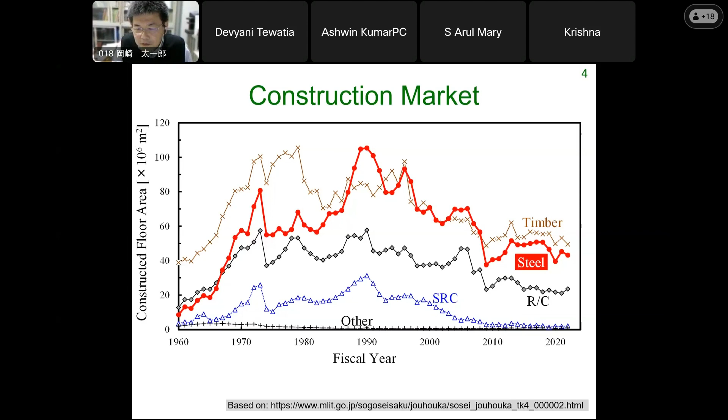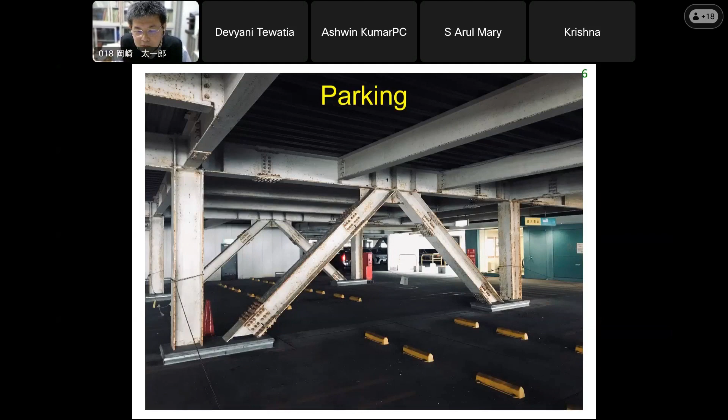Steel is favored for parking. This is a big shopping mall, and something like a good tenth of the building is parking, and basically the whole shopping mall is constructed in steel, and the steel is exposed in the parking area.

Many school gymnasiums from elementary through high school, most schools in Japan have gymnasiums, and those gymnasiums tend to be constructed in steel. Sometimes big gymnasiums would have up to the wall constructed in reinforced concrete, but still their roof would typically be constructed in steel.

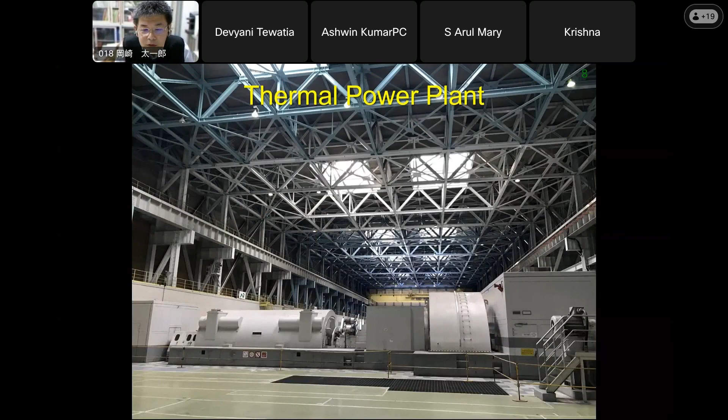Factories. Next time I'll be talking about fabrication shops. Many factories are constructed in steel. I didn't include an example today, but big sports facilities, big sports domes, they also tend to be constructed in steel. So steel is a favorite material for many different kinds of buildings. Typically they are favored for long spans and tall high rises, but they're also very popularly used for ordinary buildings.

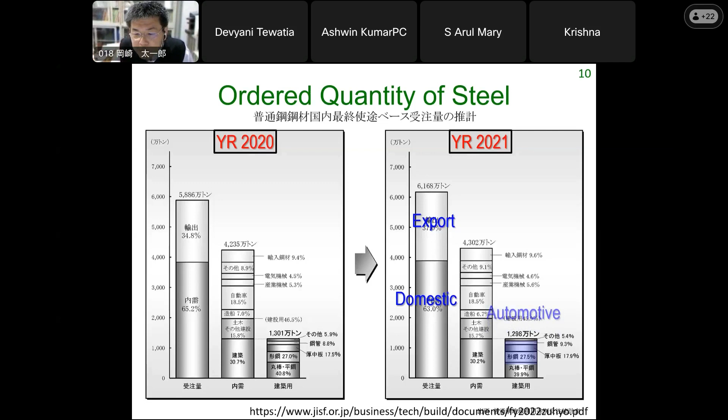And among the 63%, the primary industries that use steel are automotive, ship, infrastructure, and buildings. Buildings consume 30% of the domestically produced steel. And out of that 30%, the section highlighted in blue goes to steel buildings: HSS, plates, shapes, and rods and strips. So roughly 20% of the domestically produced steel goes to buildings.

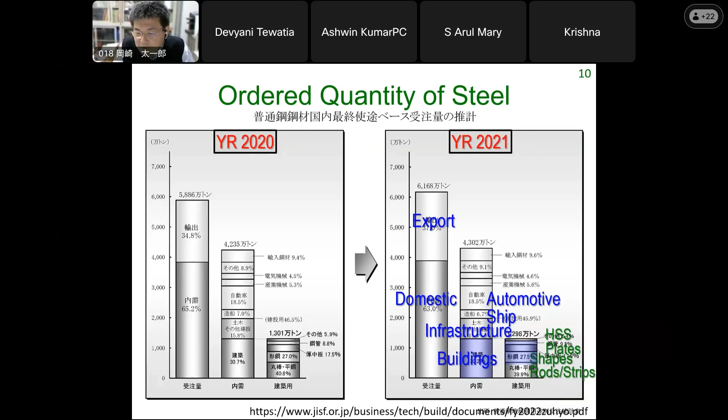There's not a huge change, but one thing about steel construction is that a good 50% goes to low rises. A single story typically means factory buildings. Second, 2 stories, much of this goes to small buildings. Some of them can even be houses.

You might imagine steel to be used for high rises, but the proportion of steel that goes to high rises is not that big. If you look at the latest data of 2022, only 2% goes to very high rise, above 16 stories.

That concludes the introduction about the construction market, how much of the construction market goes into steel buildings. Now, the second part, I wanted to go through the historical development of steel buildings in Japan.

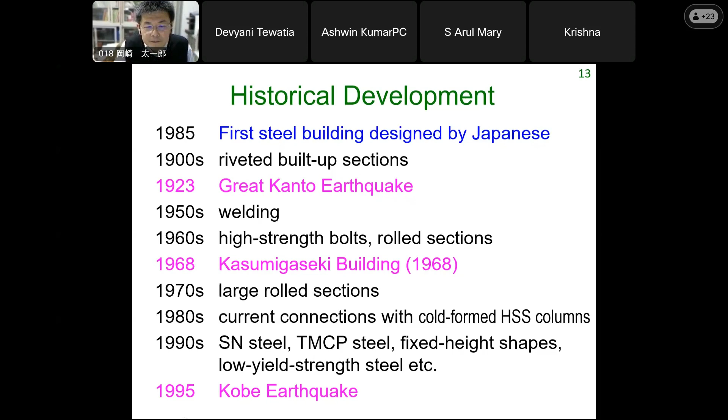Looking into this, I'll discuss more in detail in the second half about the steel available in Japan. But the first industrial steel grade in Japan was introduced in the 1950s, and they were called the SS or SM grade. Rolled shapes became available in the 1960s, and in the second half of the 1960s, we began to form HSS, the square and round hollow sections.

Now, in the 1990s, the newer steel grade was introduced. It's called the SN grade. And another important aspect is that this grade for HSS sections that we named BCR and BCP were introduced.

Okay, so I'll revisit this later, but basically by the 1990s, the type of steel available today and the construction schemes available today were introduced to the market.

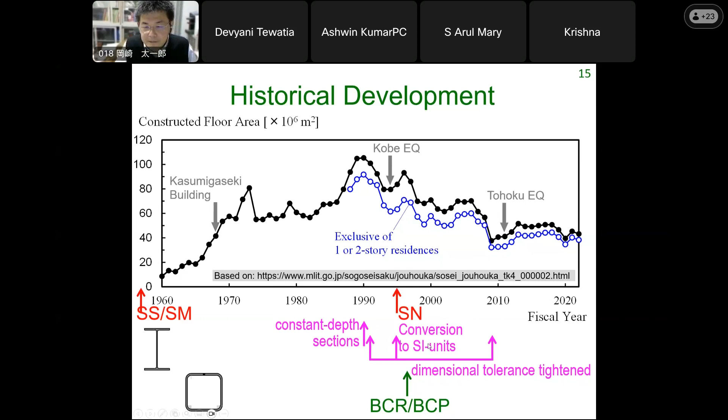Now I'm going to talk about some of the pivotal events. The first, the 1923 Kanto earthquake, exactly 100 years ago.

At the time, steel buildings were constructed in Japan, but they were sought as a very economical method to form big office buildings. The technology was imported directly from the US, and some of the first large steel office buildings constructed in Tokyo were designed by American engineers. Now, these buildings didn't fare very well in this earthquake.

They adopted the latest US design at the time. They didn't exactly collapse, but as you see in this photo, they underwent very severe non-structural damage. They didn't fall apart, but they experienced extensive damage to the exterior finish. Back then, the style was that every building should look like masonry in appearance, but those that appeared to be masonry were not detailed to carry lateral loads. The steel was very flexible and allowed a lot of deformation, and the external finishes were not able to follow through the large deformation.

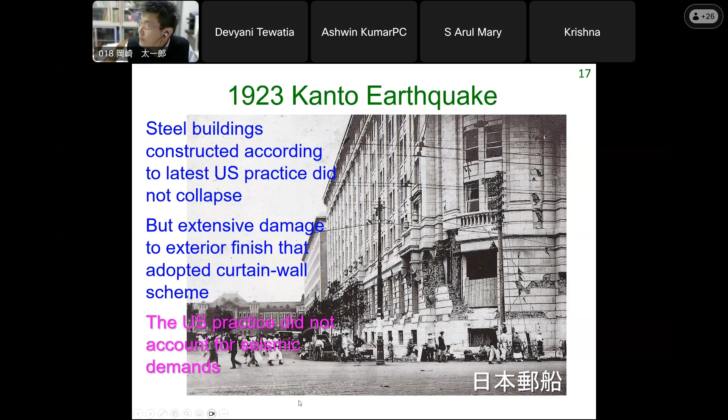Basically, the U.S. engineers at the time did not know about seismic demands. Another example, a different building - these photos were taken 100 years ago, so they're black and white. You see a lot of cracking marks, and it's very clear in this photo that the building is tilted after the earthquake.

The perception was that steel buildings are not good for earthquakes, meaning steel buildings are not very good for use in Japan. Other construction types fared much better than steel buildings at the time. Steel buildings didn't collapse, and probably didn't kill a lot of people, but the severe damage to the external finish meant they had to go through very extensive repair, or they had to give up use of that building.

Steel was denied, and after this Kanto earthquake, steel reinforced concrete, the SRC that I briefly mentioned earlier, and reinforced concrete shear walls became the system of choice. This building I'm showing used very bulky reinforced concrete shear walls, and it survived the same Kanto earthquake with hardly any damage. So, in comparison, steel didn't look good.

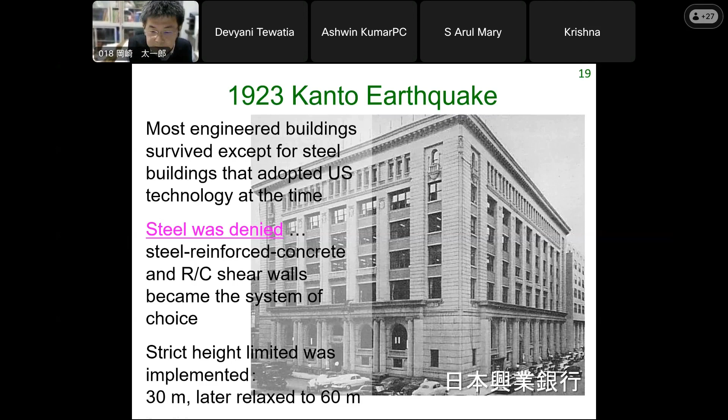One of the first buildings that broke that 60-meter height limit was the Kasumigaseki building, constructed in 1968. It took 40 years after the Kanto earthquake, or 45 years to be more precise, to revisit high-rise construction. The Kasumigaseki building exceeded the 60-meter height limit by a big margin - it was 147 meters. It has gone through several upgrades, I think 3 or 4 major ones, and it still stands in central Tokyo today. This building marked the beginning of high-rise construction in Japan.

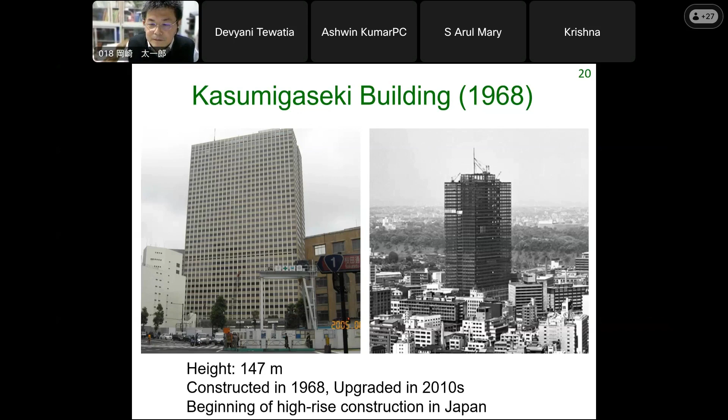Now, about the same time, I want to introduce the Century Royal Hotel, constructed in 1970, not exactly the same time as the Kasumigaseki building. This stands at 69.3 meters, exceeding the 60-meter mark. This was actually the first building in Hokkaido, the region where I am, to exceed this 60-meter limitation - qualifying as a high-rise building in Japan.

And to those of you familiar with steel design, this was actually the first eccentrically braced frame in the world. Eccentrically braced frames, or EBFs, were researched in the US in the late 1980s or 1990s, but this building was constructed decades before that time.

Sadly, it's been more than half a century since this building was constructed. They decided to demolish this building next spring.

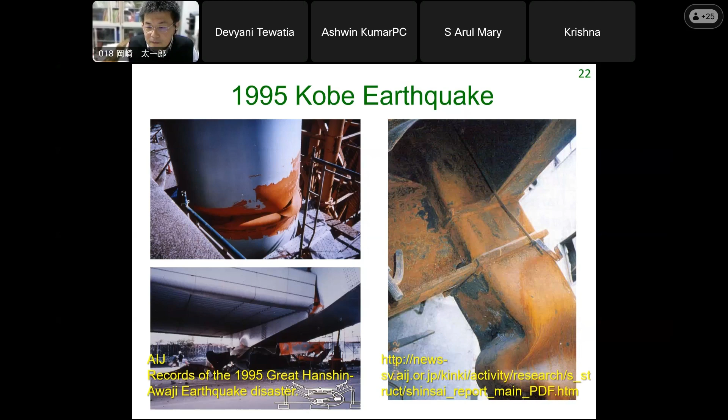This is a steel construction. To the right, this is a steel building. The connections performed quite well, but look how badly the column is deformed. The Kobe earthquake damaged many steel buildings and facilities. This photo assembles damage to steel braced systems.

The diagonal braces tend to be the first structural members to experience damage in an earthquake.

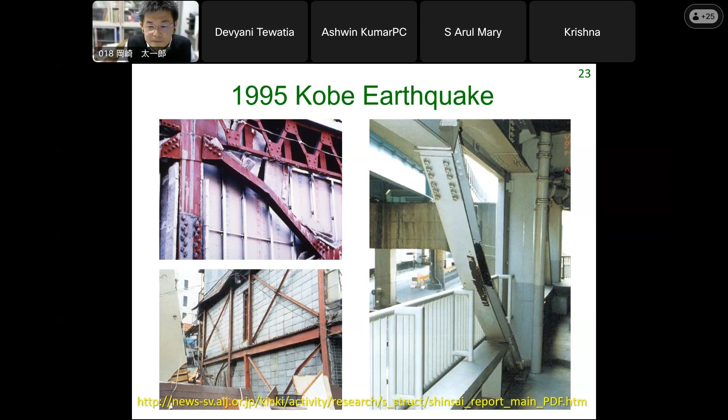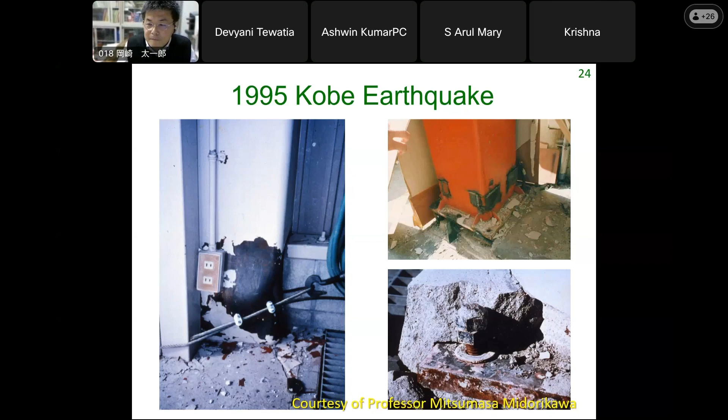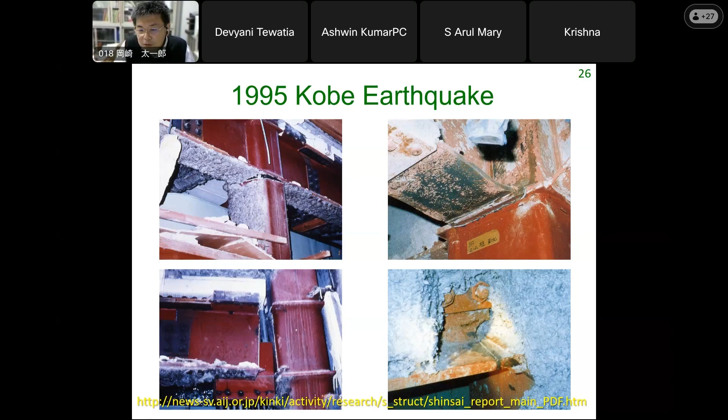Now let me spend some time explaining this. Many buildings experienced this damage. In many steel buildings, the rigid connection between the beam and column fractured at the bottom beam flange. To take a very close look, here.

This fracture tends to happen near the weld cope. To achieve a complete joint penetration groove weld between the beam flange and the column, we would want to introduce a weld cope to allow continuous welding across the beam flange. But people realized that the presence of the weld cope seemed to have been the direct cause of the fracture. In this case, the fracture probably initiated at the end of the weld cope right here, and immediately fractured across the entire beam flange.

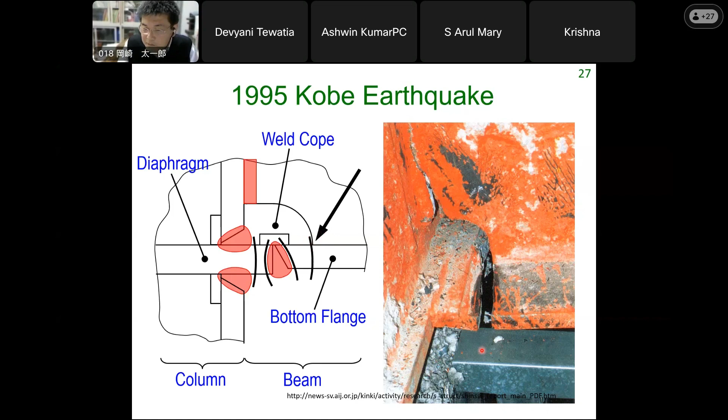After the bottom beam flange was separated, the fracture started to go into the web. This type of failure was observed in many different buildings. Another example, looking at the bottom beam flange connected to a column: similar to the example I just showed you, the fracture seemed to have started at the end of the weld cope.

Another example. In this case, the connection seems to have done a little better because we see good evidence of plastic deformation in the beam flange. Anyway, people realized that the welded connection between the bottom flange and the column is where we really need to pay attention to achieve good steel buildings.

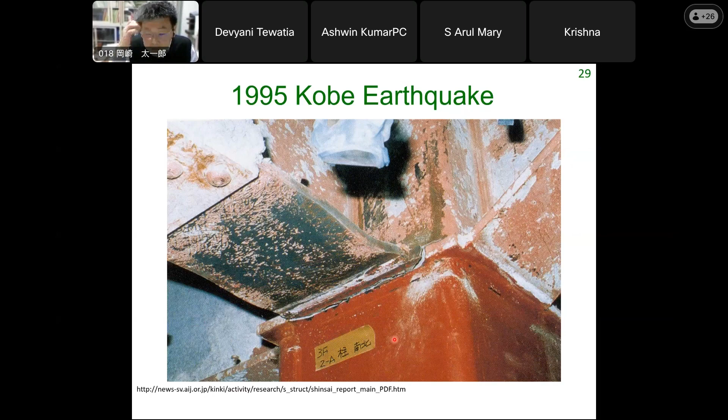I'll talk about this a little more next time, but I wanted to give you an idea that a lot of this experience, or what we do in the design and construction of steel buildings, is established based on all these experiences in the past.

Okay, moving on to the next subject: the types of steel that are available in Japan.

This may be somewhat detailed, but it's a unique feature I want to convey today. There are two types of steel used for buildings in Japan. One is the type defined in the industry standard, and the other is a category we call minister-approved steel, which is not part of the industry standard but is approved by special permit.

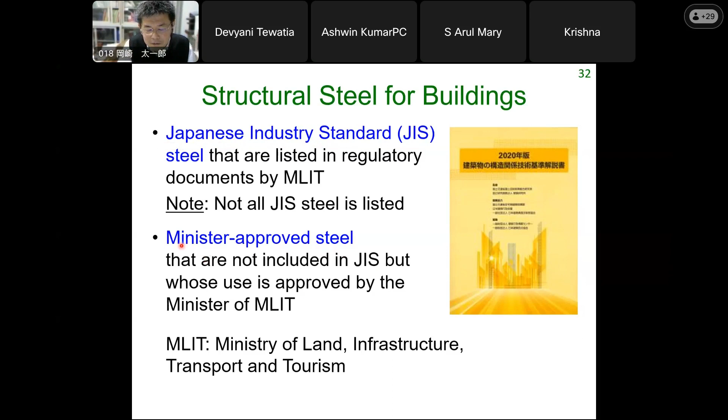The newer steel tends to be outside of the JIS. They are not part of the JIS, but they are approved company by company and factory by factory by the Ministry of MLIT, basically the Ministry of Construction. So this may be one takeaway about Japan: we have two different types of steel. One is part of the industry standard, and the other is not part of the industry standard but is permitted by special approval.

With that in mind, I'm going to walk through the most common grades of steel in Japan. The first and original grade is SS. There are actually three different grades, but today we don't see SS490 or SS540 on a regular basis. There's this original SS grade, but also a somewhat improved SM grade. The difference is that SS is the basic grade, and SM has tighter requirements to secure weldability. SS and SM were the first two grades for building construction.

The numbers 400, 490, 540 list the strength grade. I'll talk more about what these numbers and symbols mean, but right now please recognize SS and SM. The new grade was introduced in the 1990s, and we call this SN. SS, SM, and SN are the three fundamental steel grades in Japan. What I highlight in yellow are the particular grades that are commonly used. The other ones are not very commonly used - they're listed, but not commonly used.

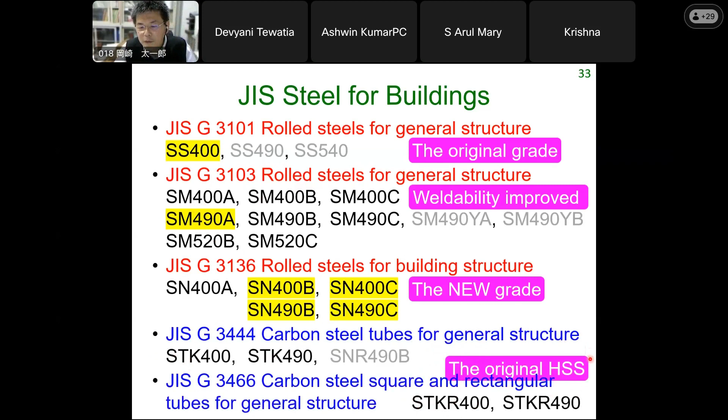We have specific grades for hollow steel sections - for rounds and for square and rectangular shapes. The rounds are called STK and the squares are called STKR. STKR were the original square sections. You don't need to memorize all this, unless you're designing in Japan, but I wanted to give you a feel of the steel available in Japan.

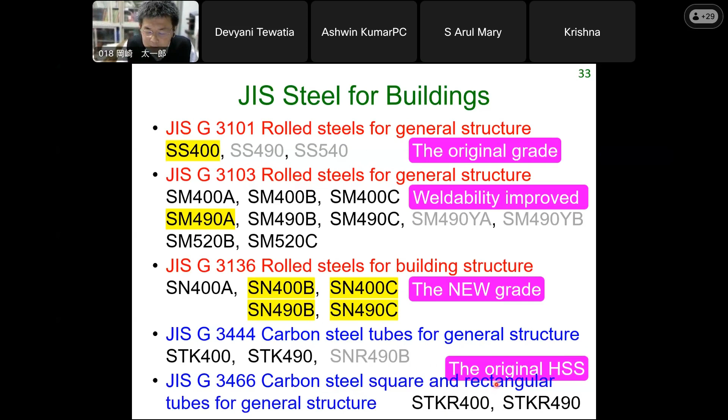SS was the original grade, established in 1952 following the British standard at the time, so there's a lot of similarity between the British standard then and SS. Later, more recently, we introduced SN steel in 1994, primarily to meet the requirements for seismic design. The two objectives were to reflect advancement in manufacturing and quality control, and second, perhaps more importantly, to include ductility requirements.

The ductility requirement is specified by what we call the yield-to-tensile strength ratio. If the tensile strength is somewhat higher than the yield strength, that means the steel tends to have good ductility. But if the yield strength is close to the tensile strength, the ductility tends to be poor. So controlling the yield-to-tensile strength ratio to be lower than a specific value is an effective means to control ductility. The American standard does the same, and the European standard also introduces this yield-to-tensile strength ratio for the same objective.

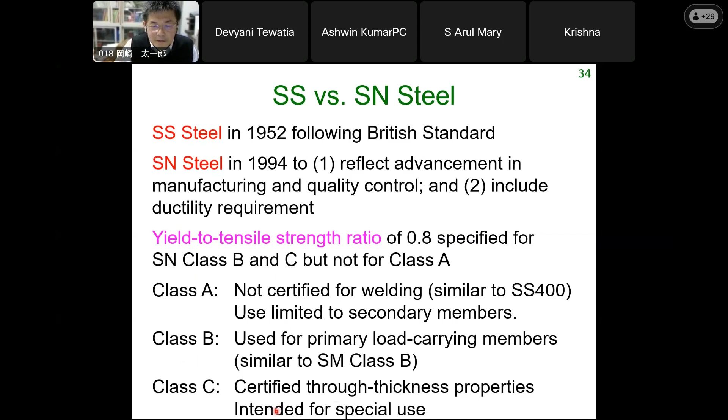I walked you through the industry standard steel. Next, let me walk you through the special, the minister-approved steel, approved company by company or factory by factory.

This approved steel is used very commonly in Japan in the form of square HSS. Most buildings in Japan use square HSS for columns, and those columns would be either BCR or BCP.

Other than this commonly used BCR and BCP, we have the higher strength grade and TMCP. TMCP, I forgot what it's short for, but this is a scheme to control the strength of steel, or achieve high strength, by controlling the heating and cooling cycle.

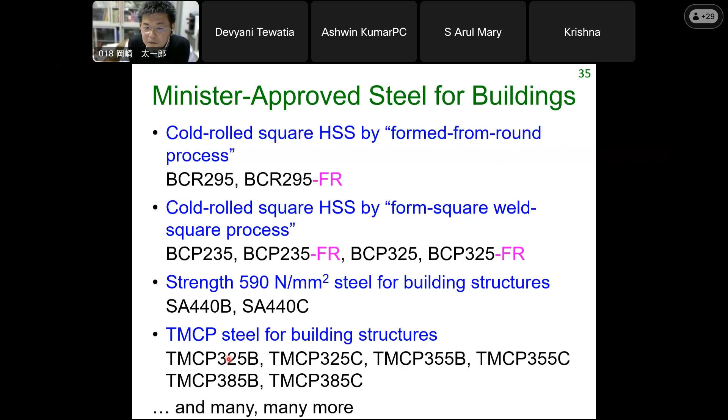These are examples, and we have many minister-approved steel types. I mentioned that almost all steel buildings in Japan use square HSS, and there are two types of manufacturing schemes for HSS: one is form from round, and the other is form square, weld square.

The first one would bend a flat plate to form a circle and weld where the plates meet, first forming a circle or round shape. Afterwards, squeeze from four sides to achieve a square shape. This is the first type of manufacturing.

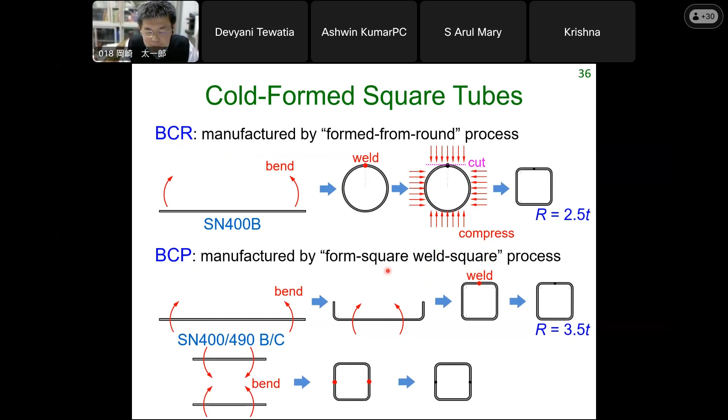The HSS formed in this scheme is called BCR in Japan. The second type is to bend the plate at the corners and weld where the ends meet. I believe the same process is used anywhere in the world, but the difference is that Japan uses these two manufacturing schemes very extensively.

Let me mention the designation rules between the industry standard steel and the minister-approved steels. I walked you through some of the most common steels, the SS, the original one, and SN, the more recent one. For SS and SN, the numbers mean the minimum tensile strength, so we have strength grades 400 and 490. A, B, C are the subclasses I mentioned.

Now, for the minister-approved steel, there's a different designation rule. The letters at the first would mean the type of steel or the type of manufacturing. The numbers, unlike the industry standard steel, these numbers 295, 235 mean the minimum yield strength, sigma Y, as opposed to sigma U.

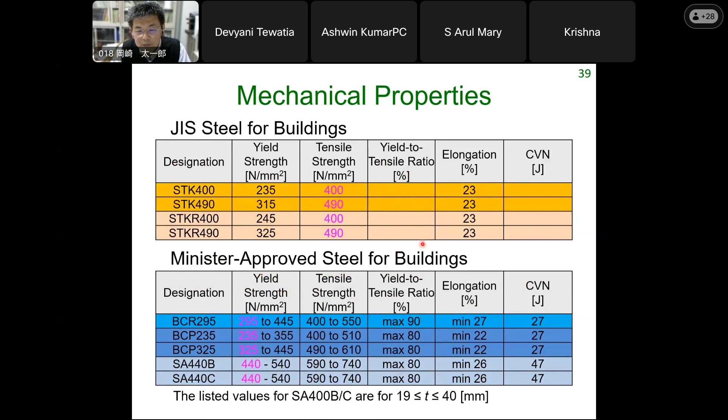One important quality control scheme for steel is weldability. The American Welding Society uses the international carbon equivalent, written in this equation, but for some reason Japan uses a different definition of carbon equivalent. We have two types - they're named differently, but they both serve the same purpose: to control weldability of steel through chemical content.

We know that carbon is good to have in steel, but if you have too much carbon, you tend to experience cracking as you weld the steel. So you don't want too much carbon. All the other chemical components are transformed into carbon equivalent - some of them are good to have, but if you have too much of them, you degrade weldability.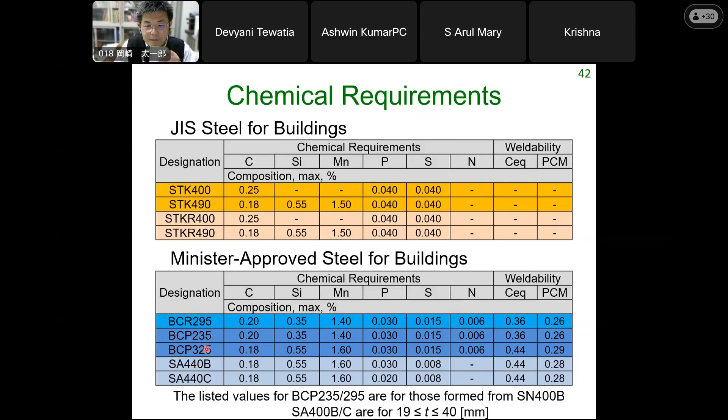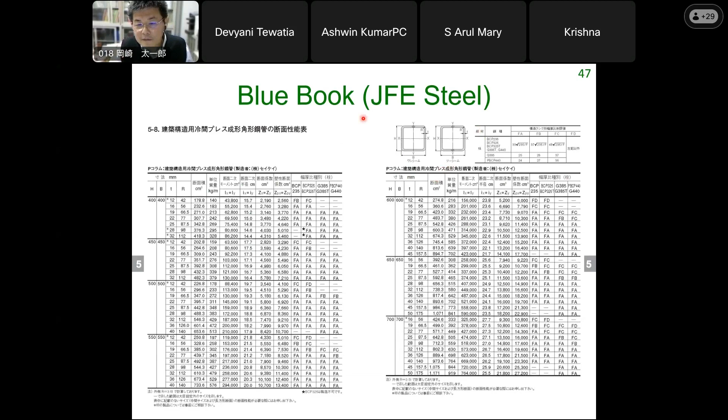Okay, that concludes part 3. Gradually moving to the design part of today's talk, let's go into codes and specifications.

The design methodology in Japan is actually quite complicated because many different books are provided by different entities. The one book that has absolute authority is the one prepared by the Ministry of Land, Infrastructure, Transport and Tourism. The Ministry of Land, Infrastructure, Transport and Tourism maintains the building law of Japan - this is the building law that any engineer has to adhere to. The law is supplemented by many sub-documents.

The second entity is the Japanese Industrial Standards. I've already mentioned this - the JIS specifies the materials and some building standards. There are also local jurisdictions - big jurisdictions like Tokyo and Osaka prepare their own design recommendations. There's also a different category of design requirements for government office buildings.

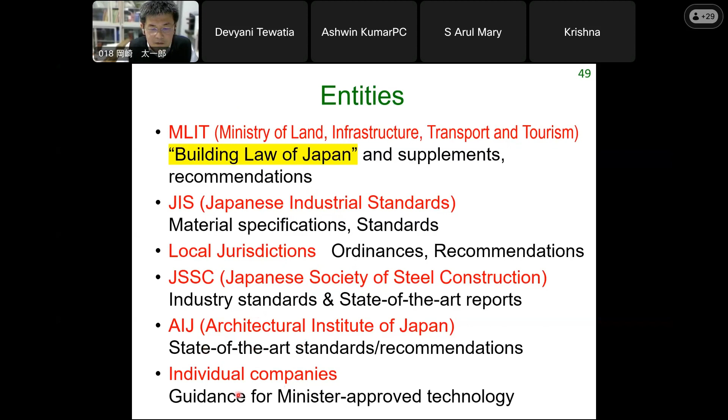Among these different codes and specifications, two entities tend to have the most authority. The left one, of course, is the building standard law - everybody has to follow the law. On the right-hand side, we have the professional society, where all the academics chip in. The academics come together to assemble and put together minds, to explain the newest research results and explain design rules in a better way.

So what's happening in Japan is that the law is the law, and the academics are academics, and there's not a direct connection between these two bodies. This is the AIJ, the academic documents - they tend to be the most updated, and therefore are referenced by engineers to supplement what the law requires. It contains the state-of-the-art academic knowledge. This is where research contributes - I, for one, do research, and one direct thing I have in mind is to contribute to the academic documents prepared by AIJ.

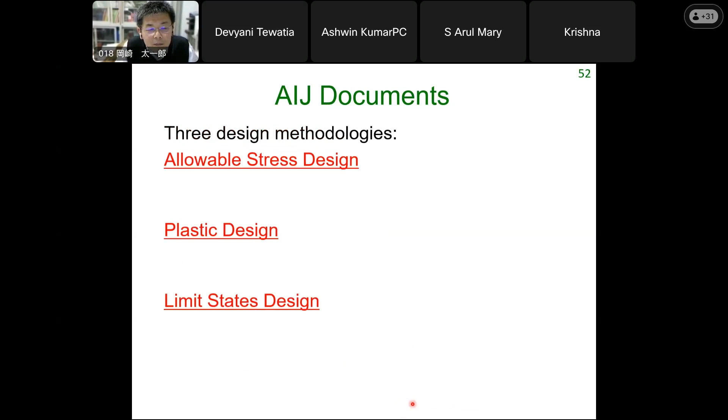What does the academic society do? We organize design rules, the three fundamental design rules. They're probably acknowledged anywhere in the world in the realm of steel design: the allowable stress design, plastic design, and the limit state design, or LRFD.

We pay attention to all three design rules, and these documents are frequently updated. This hand points to where I am a part of.

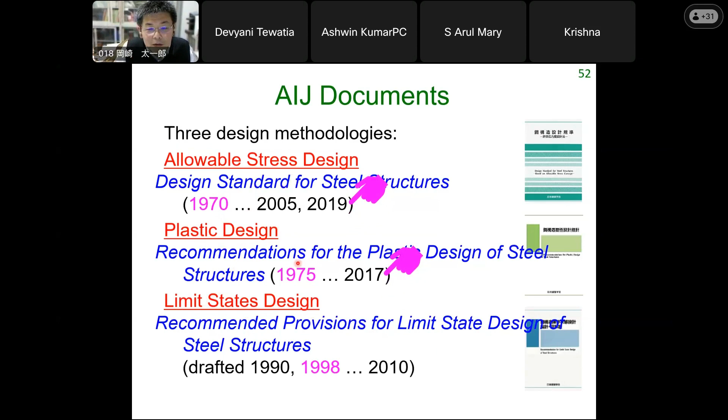The academic society prepares many other design recommendations for composites, for fire, for connections, and for tubular structures. These documents are updated every 5 to 6 years to share state-of-the-art knowledge with the community.

One area of emphasis is connections. We have recommendations for connections, and we have supplementary documents that detail bolted connections, welded connections, and column-base connections.

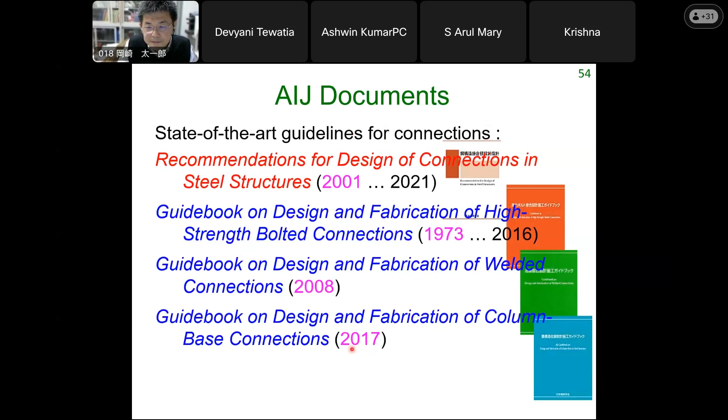The AIJ also standardizes the fabrication and construction requirements. We have two thick books, one for erection and one for fabrication, and these two books are very heavily referenced by regulations.

The AIJ Academic Society goes into really high-end techniques. One book that probably doesn't exist anywhere else in the world is how to design buildings with supplemental damping systems. There's also lightweight steel structures, and a series of books that summarize state-of-the-art guidelines for stability and sustainability. By the way, I'm also part of this last one on sustainability.

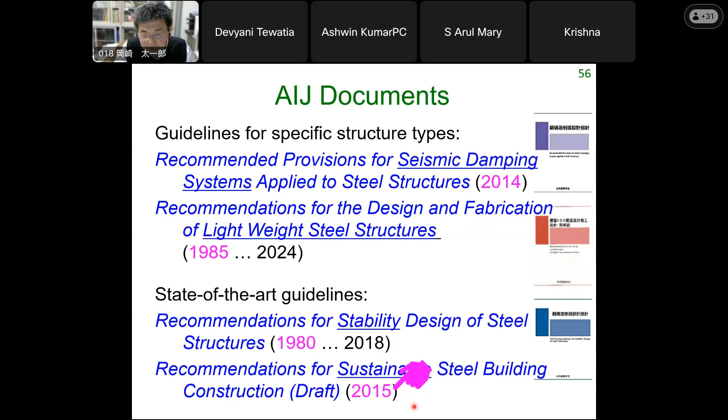I probably covered a lot of ground, but these are some of the things I wanted to emphasize. The AIJ steel documents have been updated quite frequently, because our academic community has been very active.

One aspect of what we do is that we have not converted to LRFD like the rest of the world. This is primarily because the design earthquake load is strictly governed by our building law of Japan. Because the load is defined by law, it's very hard to update the load requirements. And if you cannot control the load requirements, it's nearly impossible to discuss the reliability of our design. This is probably where we are stuck in converting or advancing to LRFD.

Now, I mentioned that we have a lot of documents, but I do personally feel that we need more coordination, because we publish a lot of books, but we don't have a single book that covers all. We feel frustrated that the building law does not change, but we probably need to accumulate convincing evidence to tell them how we can do better, and why we need to change the law.

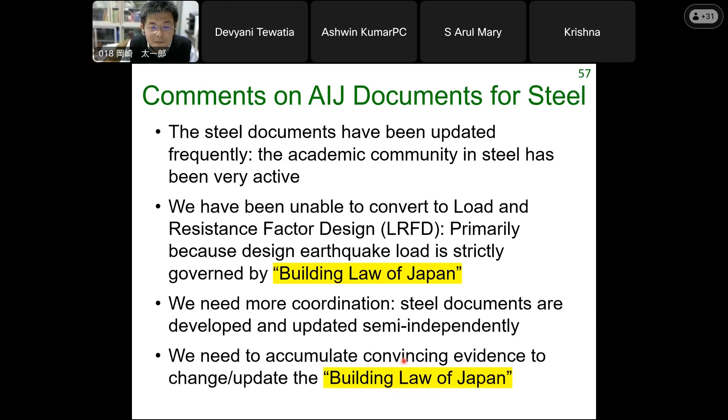Now, moving to perhaps the most important part of today's lecture, the design procedure in Japan. Going back a little in history, the building standard law is what dictates our design rules. It was first introduced in 1919.

One good thing we can say about ourselves is that after experiencing the Kanto earthquake 100 years ago, we were the first to implement seismic requirements. Back at the time, we said the seismic coefficient is 0.1 for a safety factor of 3. So the high minds at the time said the base shear coefficient is basically 0.3, meaning the safety factor times this coefficient of 0.1.

And this 0.3 is still used in our building requirements today. There was a name change: the urban building law, which only covered big cities in Japan, was spread to all buildings in Japan in 1950.

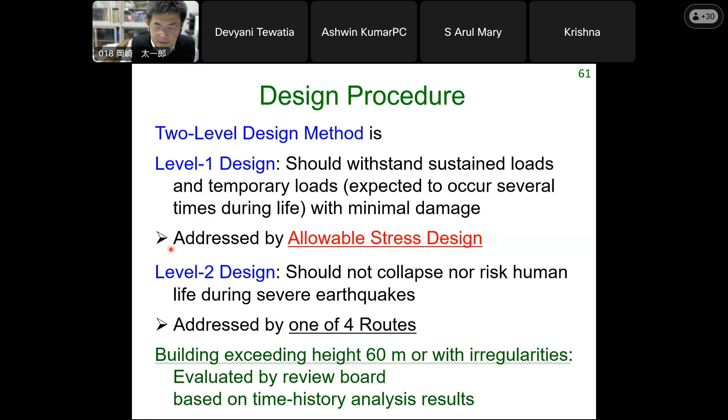Now let's talk about level 1 first. This is addressed through allowable stress design. I know it's archaic, it's been around for a good century. The requirement is that the computed stress should not exceed the allowable stress, and this sigma not exceeding f should be checked for all fibers of all sections of all members.

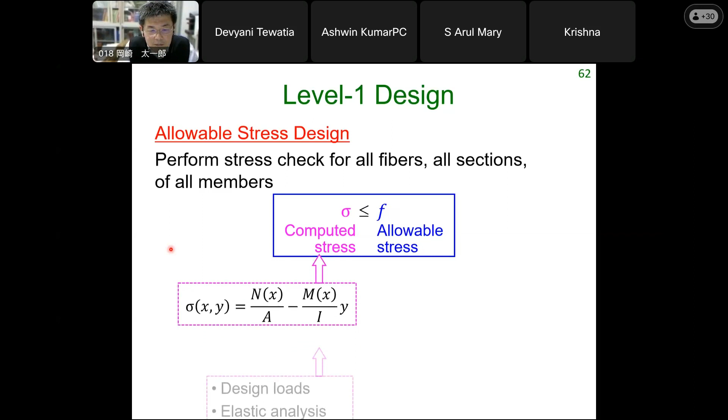The computed stress is an outcome of elastic analysis conducted on the basis of the design loads. The allowable stress is defined by the material strength, the limit state governed by either yielding or stability, and a safety factor. I think this is common knowledge to the whole world, but let me walk through the specific procedure in Japan.

So this is sustained load, meaning basically dead load plus live load. If you are in a very heavy snow area, you should toss in some of the snow load. There are three different temporary loads: snow, wind, and earthquake. In heavy snow areas, you need to consider the combination of dead and live load being there, and earthquake hitting during the winter time - not the full snow load, it's reduced, but including all four loads.

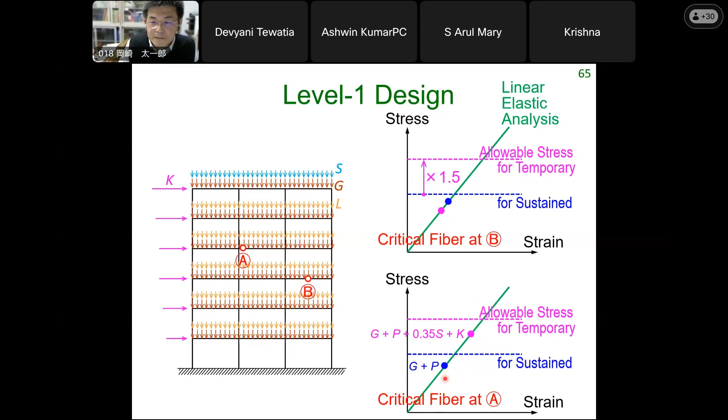Now let's look a little more detailed into the loads, particularly the earthquake loads. To the left is the seismic hazard map of Japan. Skipping the details, the darker red means high seismic risk, and blue or green means low seismic risk. So there is disparity in seismic risk in Japan - the far northeast has high risk, but there are actually parts of Japan where the seismic risk is relatively low.

But if you look into recent history, the two most recent major earthquakes in Japan, one in 2016 and one in 2018, they happened in areas where the risk is recognized as low or not too high.

Therefore, in Japan, we do not use this seismic hazard map very often, and we use this map on the right, where darker means larger earthquake load and lighter or white means smaller earthquake load, which is far less detailed compared to the seismic hazard map on the left. And the difference in earthquake load between high seismic and low seismic is not much.

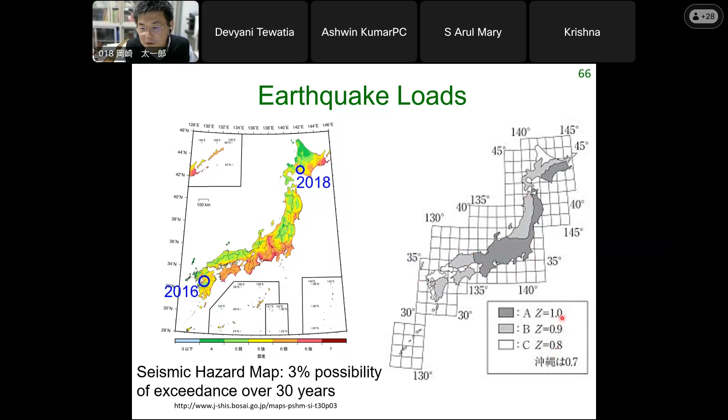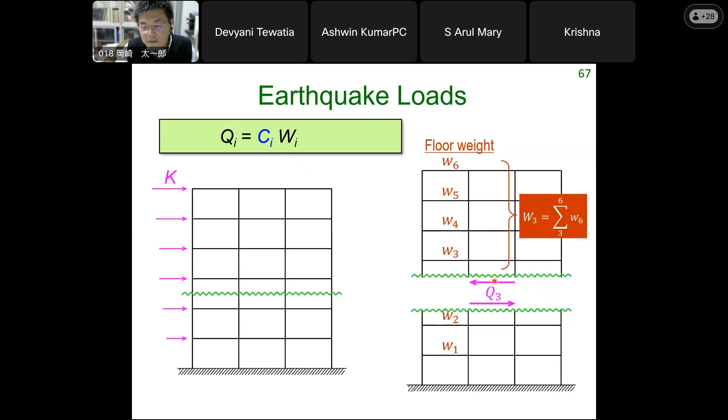Now, the load distribution is computed like this. K indicates the load distribution, but in design, what we directly compute is the story shear force, Q, as a proportion of the total floor weight resisted at that story. At this third story, the weight of the third, fourth, fifth, and sixth floors are sustained. The story shear is defined as the proportion of the weight sustained at that story. So if you want the earthquake load, you could back calculate it as the difference between the story shears.

So the earthquake load is proportional to the floor weight. I think this is common anywhere in the world, but then how is this proportion factor Ci calculated? This is a product of the seismicity zone factor that I showed earlier, where the difference is only between 1 and 0.8.

This Z factor. We account for soil amplification, the vertical distribution, and the standard base shear coefficient. The standard base shear coefficient in Japan is 0.2 for level 1.

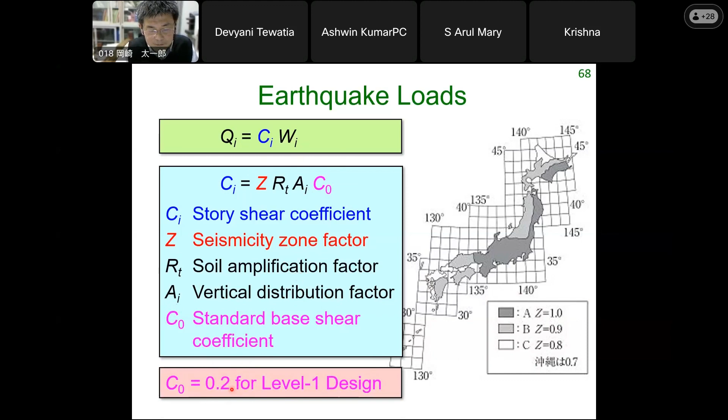The soil amplification is a function like this. It's a function of the fundamental vibration period of the building. There is different amplification depending on whether the soil is hard or soft. Soft soil has more amplification. Hard soil has less amplification.

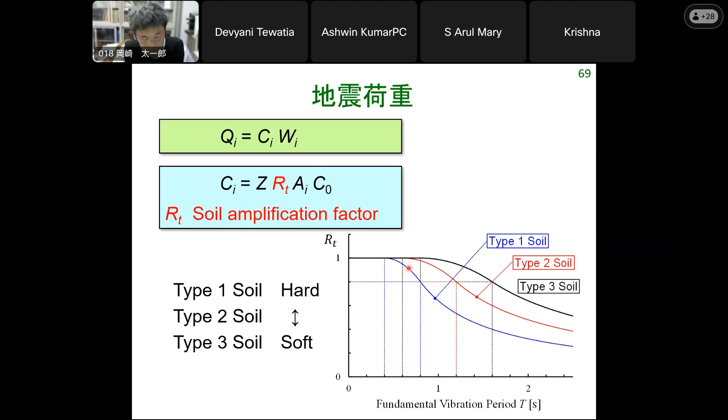And in Japan, the fundamental vibration period of buildings is computed as a function of the height in meters. So if you have a building that is 10 meters tall, the period will be 0.3 seconds. I'm talking about steel buildings. Concrete buildings are expected to be stiffer.

I walked you through or gave you some idea of the design loads. Now let's look into the allowable stress of these three aspects.

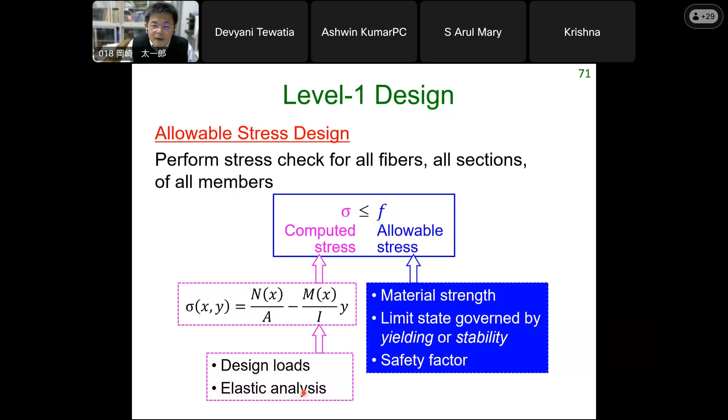Now first, about the material strength. The material strength is written as this capital F. There's a unique rule in Japan that this design basis material strength is the smaller of the yield strength of the steel or 70% of the tensile strength. The 70% of tensile strength, if this is smaller than sigma y, basically this concept is to place a penalty for less ductile steel.

This material strength, the fundamental material strength used in design, is the smaller of the minimum specified yield strength and 70% of the minimum specified tensile strength.

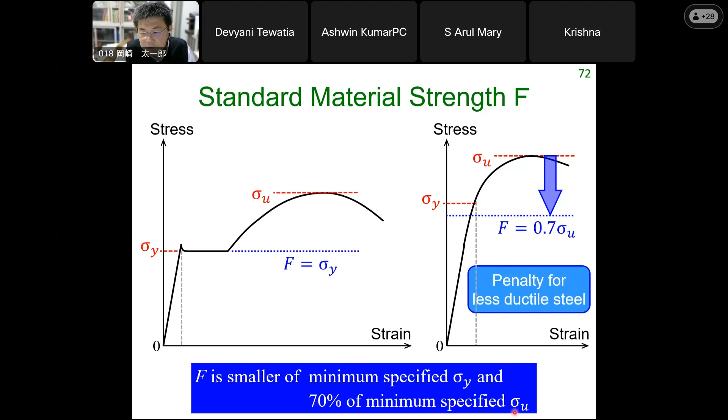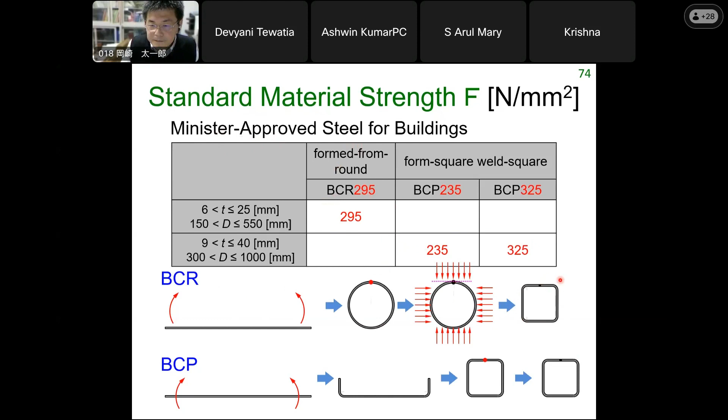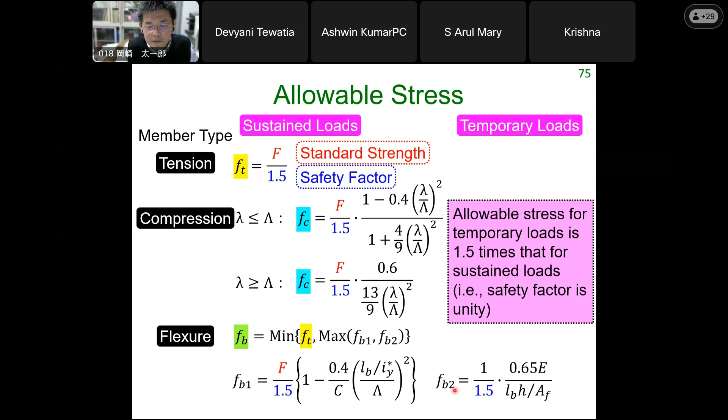I wrote out the allowable stress for sustained loads, but for temporary loads, all you do is replace this 1.5 by 1.0, and we have the set of equations that look like this. This part may have been boring, but this is our interpretation of the allowable stress design.

Okay, let's look into the bigger picture of the design process in Japan. First, all buildings are required to do this level 1 design, which is to check for allowable stresses. The allowable stress design is the older design rules, and on top of that, in 1980, we added these newer rules.

The allowable stress design, or the level 1 requirements, would dictate the proportion of members. Once we proportion the members, there's a check for drift. We check for the level 1 design loads that the story drifts are within 1/200. And afterwards, we check for the ultimate strength for larger loads.

Depending on the scale of the building, beyond here is what was introduced in 1980. Depending on the scale of the building or the simplicity or complexity of the building, you may go to the simplest Route 1, to the more complicated and complete Route 3 design. Most buildings would go to Route 3, but the simpler ones could use Route 1 - there's a Route 1-1, Route 1-2, and Route 2. Shorter buildings, regular buildings, simpler buildings go to the left. Bigger buildings, more complicated buildings go to the right.

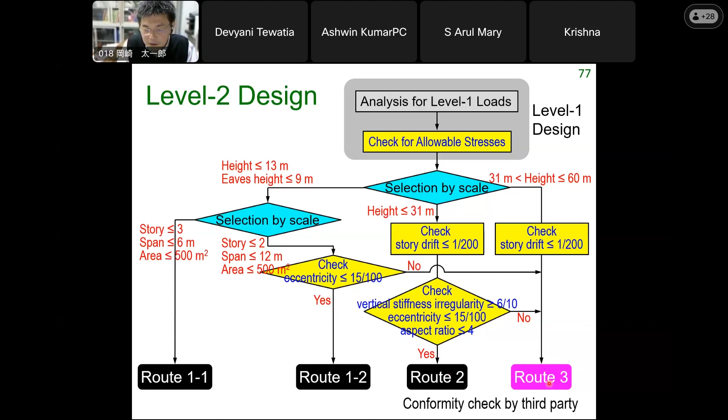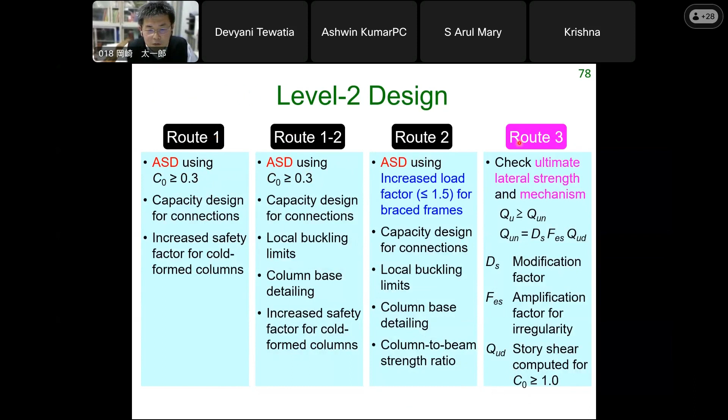And for Route 3, there's a requirement to check for conformity, or have a third party check whether your design results conform with all requirements. I'm listing some of the primary elements of the 4 different routes, but skipping the details.

Okay, the Route 1 and Route 2 actually use allowable stress design. It sort of repeats the allowable stress design, but increases the seismic loads from the base shear coefficient of 0.2 to 0.3. Now you are asked to do capacity design for connections to prevent connection failure. There are some ductility requirements in terms of slenderness and width to thickness ratio of the members, and some additional checks to address the inferior ductility of the cold formed HSS columns.

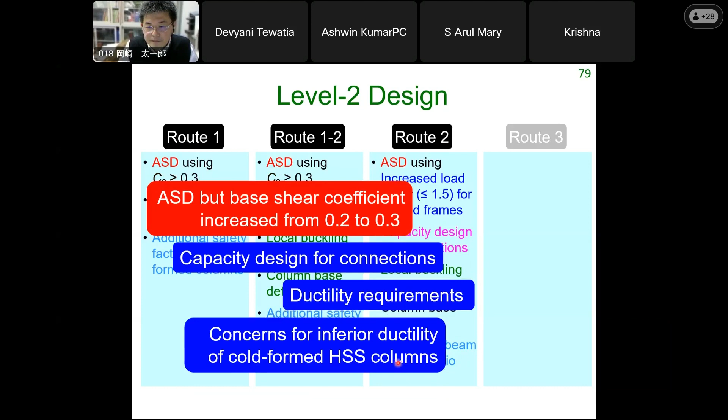Now, I mentioned ductility - that is basically checked by the B over T, the width to thickness ratio of the cross-sectional elements. For level 1 design, you can stay with what we call rank C. But for level 2, you may be required to use rank B or rank A members.

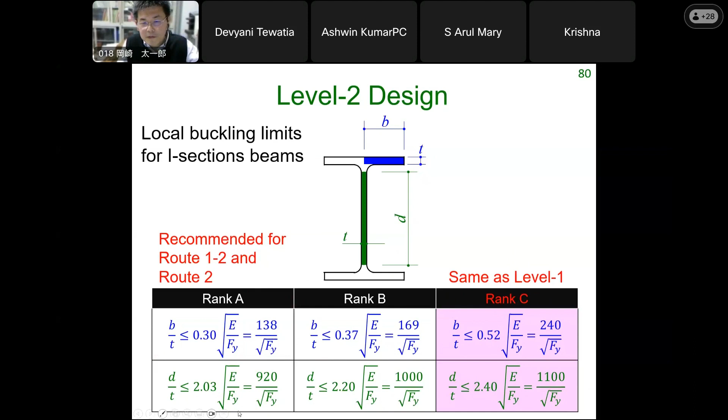We have these sets of B over T ratios, or limits, for I sections used as beams, I sections used for columns, HSS sections used for columns, and all different section types.

Now, going back to this list, let's look into what this Route 3 means. Route 3 asks to check the ultimate lateral strength and also check what kind of energy dissipation mechanism your structural system would form.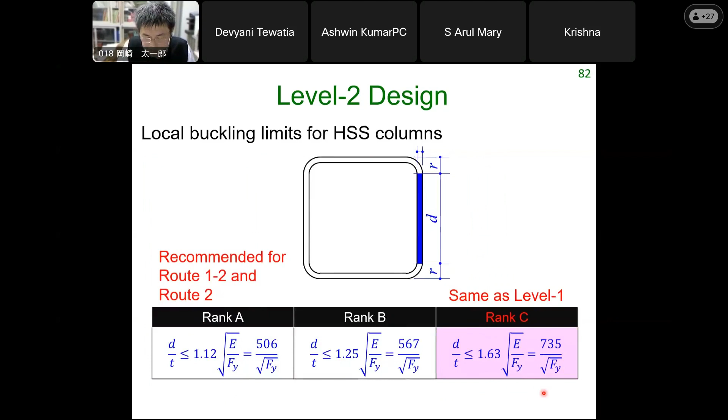If you have a lot of rank A members, then you win ductility rank A. If you have a lot of rank C members, you're bumped down to rank C.

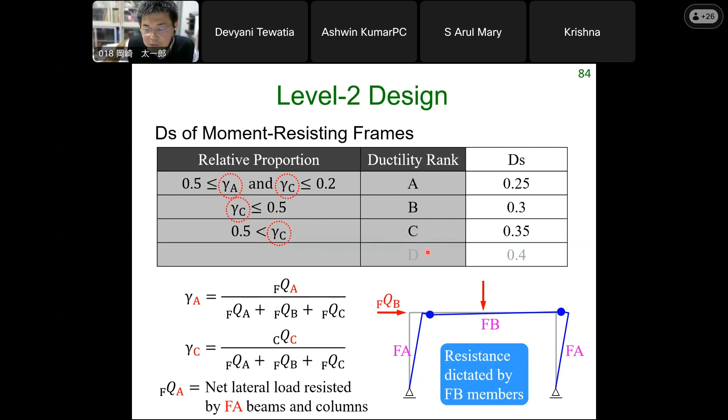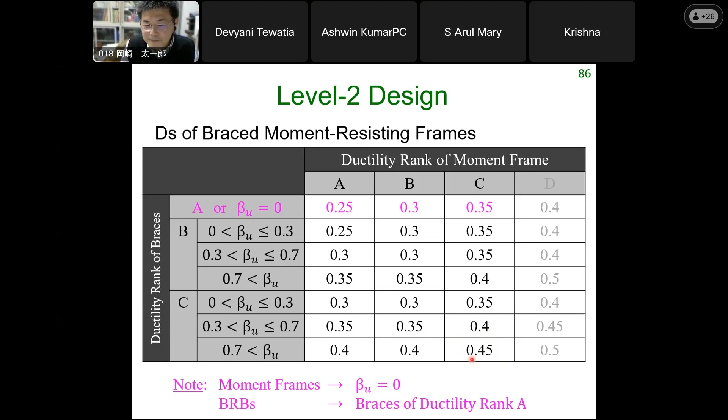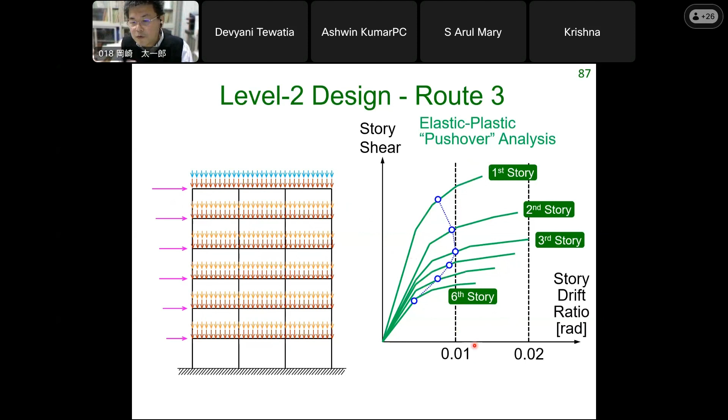If we do this pushover analysis, most engineers say that when there's one story that reaches a story drift ratio of 0.01, that's when I check my ultimate strength.

I've computed the ultimate lateral strength for my first story, second story, third story, and so on. For each story, I check whether the computed capacity exceeds the requirements, the required story strength. And if the capacity exceeds the requirements for all stories, then my design is fine.

There's a second check. Engineers would further push until one of the stories reaches a story drift ratio of 0.02. Under this state, they check to make sure that the energy dissipation mechanism is according to what he or she believed the system was designed for. Push further to here to do these two checks.

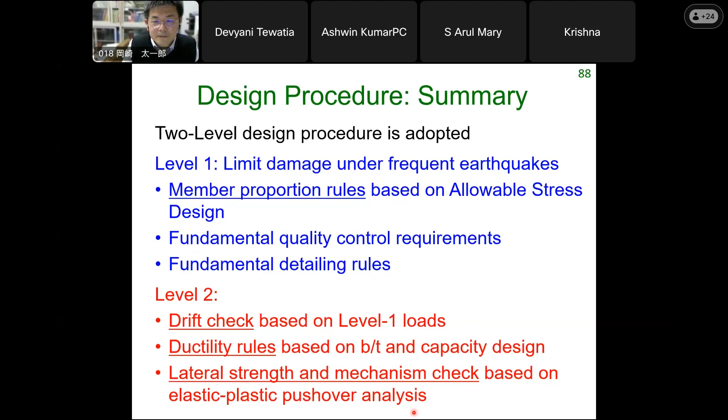So let me add a couple of comments. Some of you may have been shocked that the procedure is quite simple. The fact is that the Japanese design procedure has remained mostly unchanged since the 1980s.

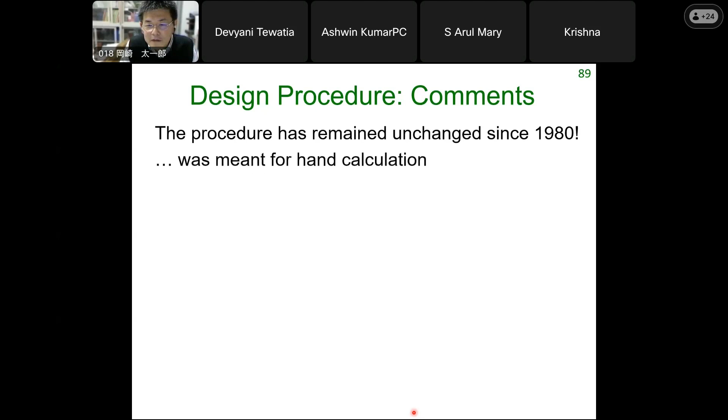And what does that mean? Back in the 1980s, we didn't have computers, so the procedure was meant for hand calculation. From the current point of view, the procedure is not necessarily suitable for computer-based analysis and design.

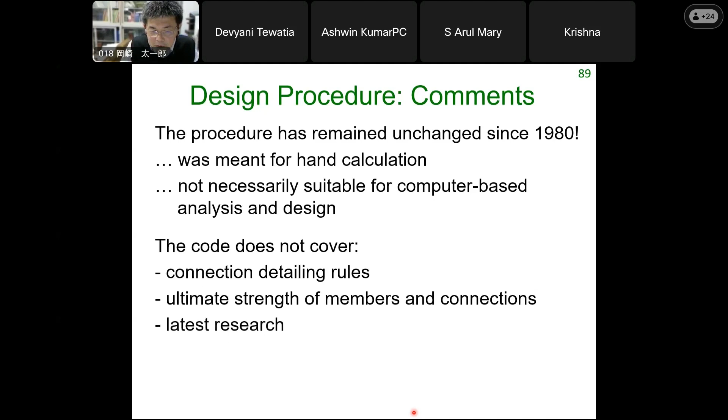Now, the code does not cover connection detailing rules, and I mentioned elastic plastic analysis, but the building standard law does not define the ultimate strength of members and connections. It certainly does not include the latest research. And these are precisely the areas where engineers look into academic documents to learn more about how to do good connection design, how to evaluate the ultimate strength of members and connections to feed into the computer analysis.

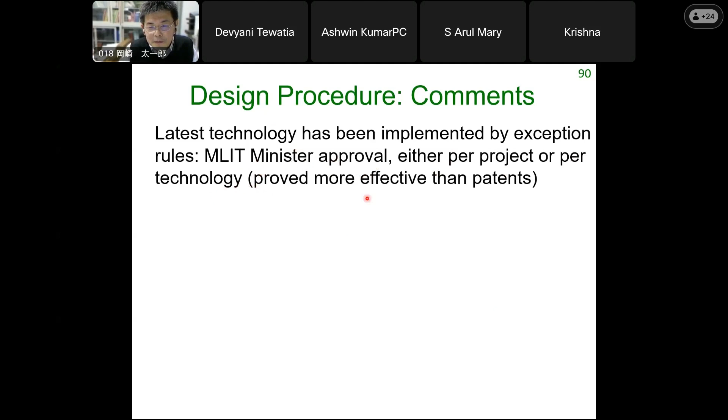Furthermore, the latest technologies are not implemented in the code. They are implemented in practice through special minister approval. The approval might be done per project or per technology. This is a very unique system that proved to be more effective than patents in the Japanese construction market.

Now, some of you may be aware that buckling-restrained braces (BRBs), eccentrically braced frame systems, and twist-off bolts are technologies invented in Japan. Now, these Japanese inventions are not implemented in the codes. Some of them, or actually most of them, are recognized by minister approval.

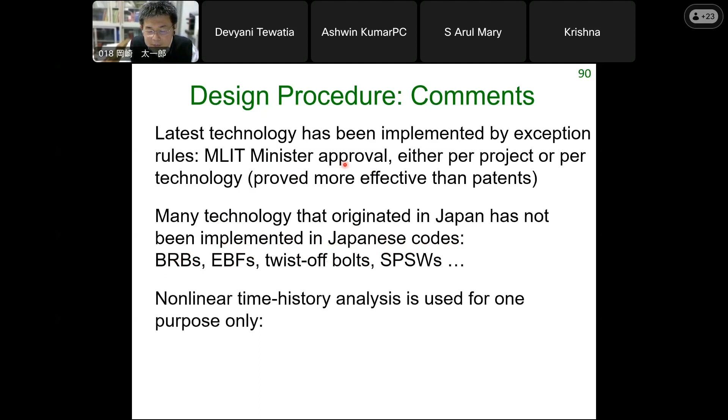The nonlinear time history analysis is taught in college education, but the only case where this is used is to check for story drift in high-rise buildings and special buildings.

Now, I'm trying to convey some of the frustration I feel, and give you a sense of where I feel the Japanese steel building industry should be heading. Future directions: I think we need better coordination between different entities, including government, industry, and academia, to better assemble design rules that are scattered over many different sources. We should develop design methodology that takes advantage of the latest analysis methods, improvement in quality control, and the ever-advancing information technology. There is more and more pressure to improve productivity of the industry.

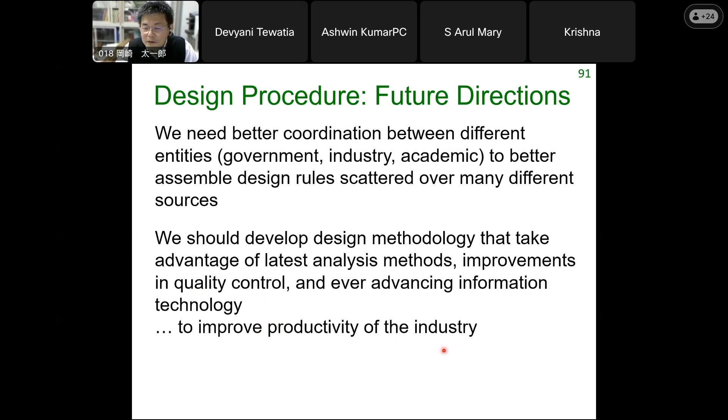Okay, I'm coming close to the conclusion of today's lecture. Let me try to summarize. I started off by explaining that in Japan, steel has enjoyed a very large share of the building construction market, perhaps a bigger share than any other country in the world.

But somehow the material and construction scheme has remained rather unchanged since the mid-1990s. I'll discuss the material and construction technique more next time. There have been advances, and I'll talk about that as well next time. The big problem is that the design procedure has remained rather unchanged since the 1980s.

Especially after the Kobe earthquake, this 1980s change proved to be effective. That's a big example that our design procedure has been effective through many major earthquakes. But as I tried to explain towards the end, we do see opportunities for improvements and advances.

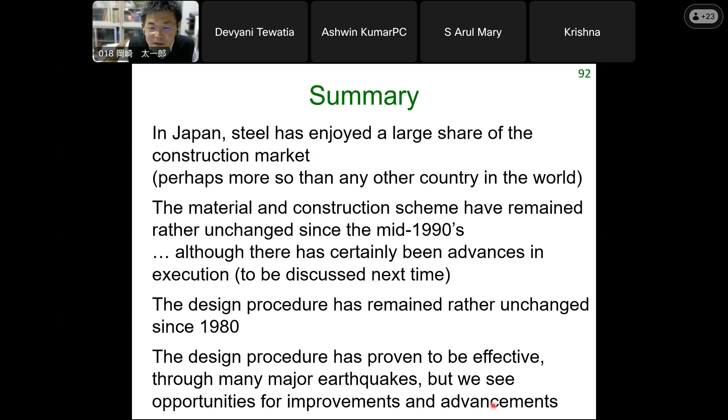Okay, I talked a lot, but I hope there have been enough takeaways. Thank you very much for your attention, and I'll be glad to answer any questions that you may have come with.

Okay, let me stop my slides. How do I stop? Okay.

Well, okay, thank you, Dr. Okazaki. It was a very insightful, detailed, and educating presentation. As of now, we have not received any questions in the chat box, but anyone who wants to ask a question can also raise their hands. We will unmute them. And yes, we do agree with what you summarized, and for the future directions, we hope to see those being implemented in India as well. So we don't have any questions for today, but we look forward to your next presentation, which is on construction and fabrication of steel structures in Japan.

Yes, okay, so we have a question here: Why is the limit state method not under current practice in Japan? Yes,

this is actually an issue that I'm personally working on. Okay, I don't have a slide or board, and it's a pain to write on the whiteboard on screen. If you look into how LRFD was developed, you have to analyze the reliability on the structure side, and also the reliability on the load side. Okay, the scatter of structural performance is due to scatter in the loads and also the scatter in the structural performance coming from scatter in material strength, and also the quality control and such. Okay, you have to look into all of that and come up with and analyze the reliability of your design.